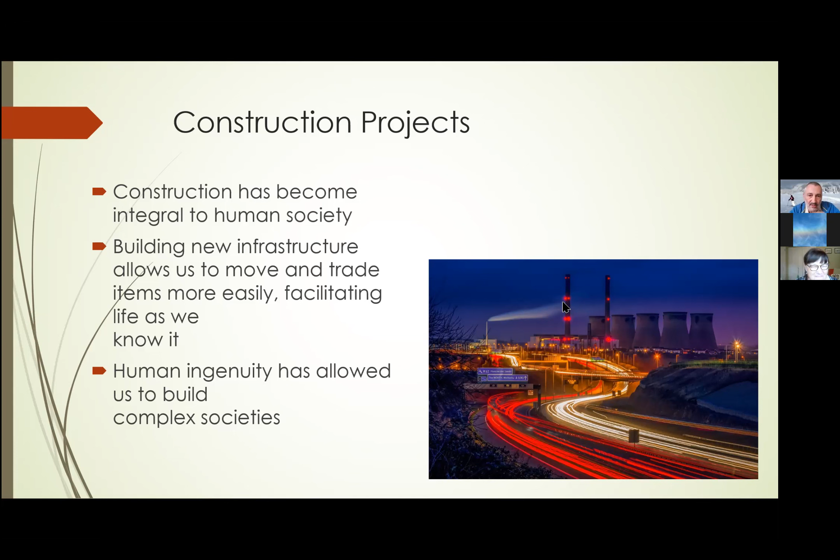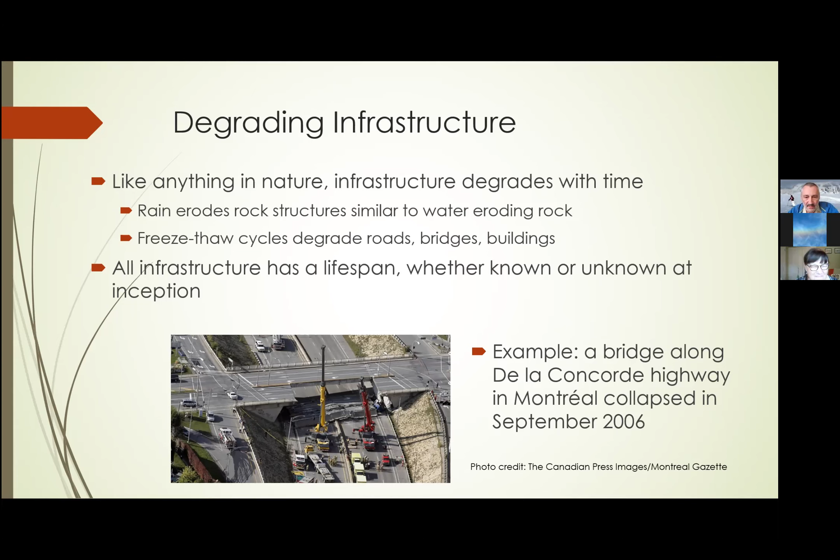See if I can move my thing out of the way.

Okay, so degrading infrastructure, depending on the land use, one of the consequences of infrastructure failure can be the release of toxic substances. Sometimes, of course, toxics are being released really essentially on purpose. And this often used to be the case. In fact, we can still detect sites around the world that were polluted under the Roman Empire some 2,000 or so years ago. Most of the places where they mined materials like lead and copper can easily be identified, especially when those were being smelted near their mines. We can still find the toxins that were released as a result.

We also know that the Romans contaminated a lot of the lakes in their empire, both with nutrients from agriculture and waste from things like towns and cities. And indeed, they would commonly dispose of waste into water, much in the same way that we do today. So there are all kinds of toxins out there that can be released into surface waters, groundwaters, soil, air, even into bedrock, which in fact is involved at Love Canal, which you'll see in a minute. And there are well over 60,000 man-made chemicals in addition to all of the minerals that are naturally occurring. So extremely complicated systems into which a wide variety of toxins can be introduced.

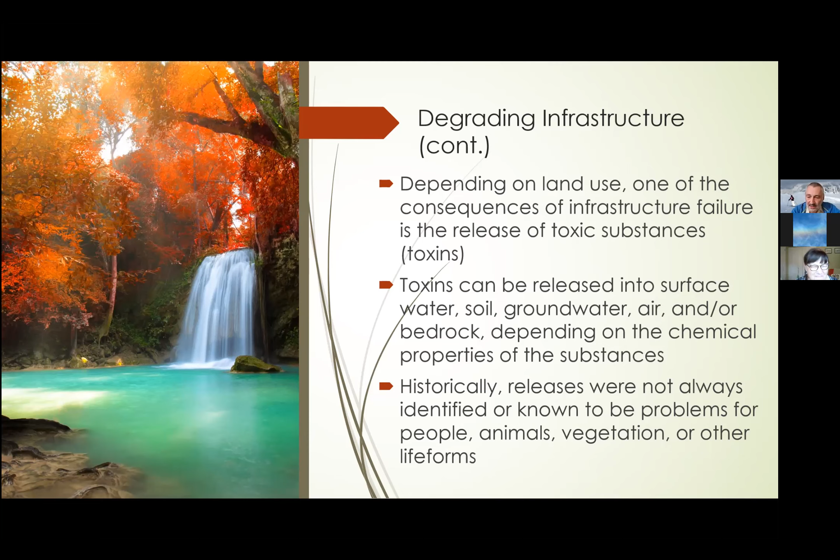So we haven't always known what the problems might be from releases, whether they were intentional or not. But certainly over the last, I would say, 50 or 60 years, we've been able to identify all sorts of effects on animals, vegetation, and other kinds of life, even down to bacteria. Move this box again. So contaminated sites are places where our human infrastructure has degraded and caused release of toxins into these surroundings. I should add to that, they also include places where we have simply allowed materials to get released, haven't sufficiently taken care to make sure they got contained or allowed the containers to degrade, which is what she's after here.

Toxins can be persistent, especially if they are heavy metals, which essentially never go away. Sometimes they can be changed into other forms that are more or less toxic than what is originally released.

They can certainly make life ill. Life forms can get very sick from being in contact with toxins, whether they are absorbed through the skin, inhaled, ingested, whatever it might be. But sometimes the effects are really not very noticeable.

For example, you can get effects on reproduction where you have an adult organism that appears healthy, but is incapable of producing viable offspring. And at the other end of the spectrum, it's possible to die from getting exposed to something on a contaminated site.

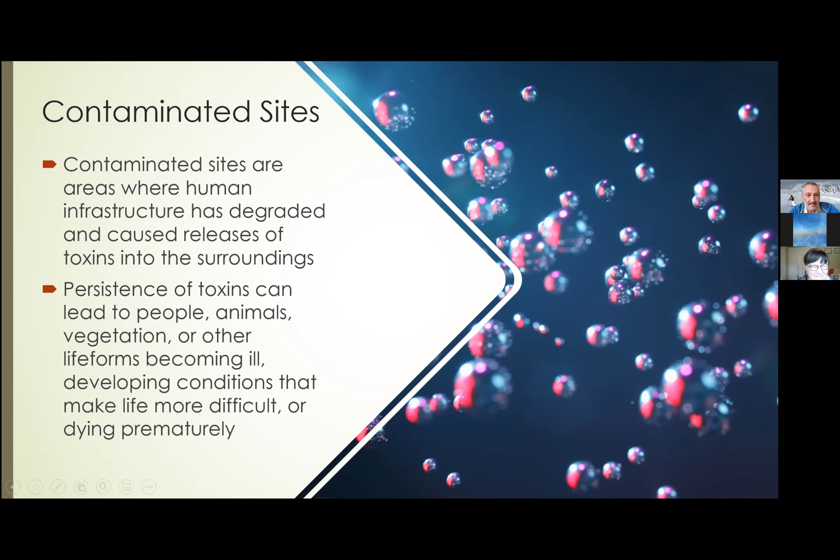So what can we do about contamination? We have a limited amount of livable land, as she termed it. Habitable land is another term, essentially equivalent. Any area where we have contaminated the land that might be important later for sustenance of other people and other life forms is what can be considered a contaminated site, and for all intents and purposes, no longer habitable.

Cleaning up contaminated sites has been done for a long time, but it's really become ingrained in our thinking, I would say, in approximately the last 5 decades, really starting in about 1970 with the United States going forward with the United States Environmental Protection Agency and the National Environmental Policy Act that came in at the same time.

In Canada, generally, we have a framework. It depends on which province you find yourself in, because this is really not highly organized at a federal level. Sometimes you're subject to federal rules for one reason or another, such as land ownership. Often you're subject to provincial rules, and whichever one is the most stringent is probably the one that's going to have primary effect.

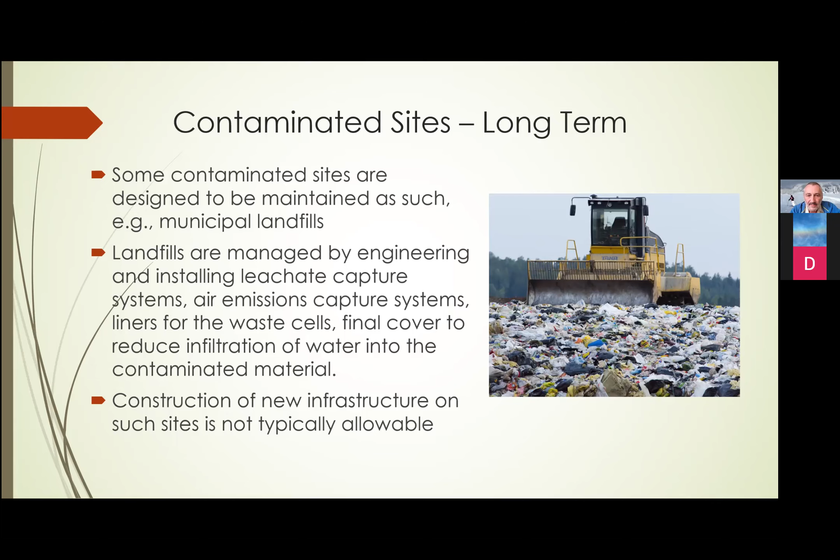Very famous contaminated site in Ottawa. And that was mainly because of a wide variety of small industry that was there. So if you have a contaminated site, you're often not allowed to build anything on it until you've done some kind of cleanup. So that would be called a brownfield.

So what happens if you build on a contaminated site? She chose to bring forward one of the most famous contaminated site incidents in the world, which was at Love Canal.

And the original idea by William Love was that he would build a canal to bypass the falls and allow shipping to get between the two lakes more easily. There was a wide variety of problematic economic conditions in the 1890s and 1900s. Eventually, the canal project and the adjacent residential development project both went bankrupt.

There were sales that resulted in the land being taken over by various organizations. One of them included a local power company. One of them included Hooker Chemical Company. I'm sure there were many more complex legal cases. So parts of the canal were used to dump municipal garbage in the 1920s and later by Hooker Chemical in the 40s and early 50s to dump chemical waste.

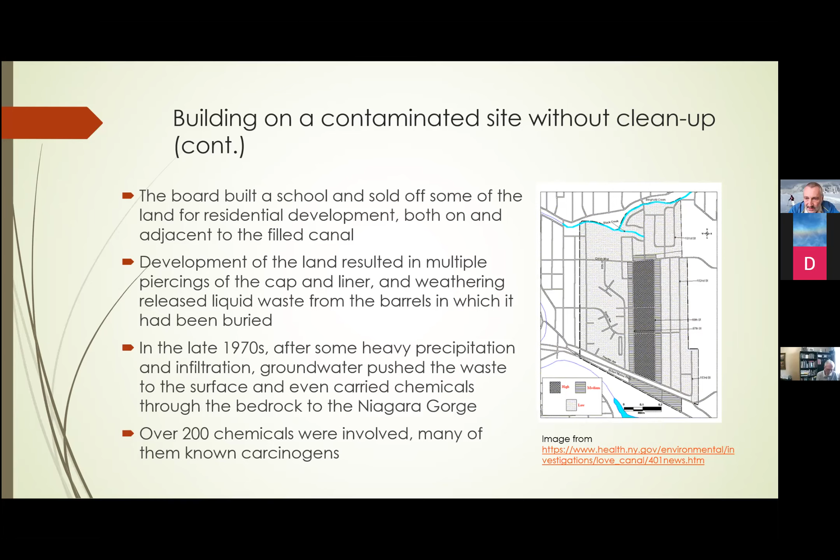As a result, gardens died, but people started getting sick. And it turned out that lots of the young families that were present in the area were experiencing defects among the children that they were having. Eventually, the United States federal government, the EPA, was forced to take over the site, and it became one of the first sites that was put on the national priorities list under Superfund and the comprehensive... I wrote that name down because I knew it was going to be difficult.

CERCLA. Maybe I left the notes upstairs. Where's CERCLA? Comprehensive Environmental Response legislation. Anyway, the L stood for liability. Of course, it doesn't affect Canada directly, and I haven't been involved in this kind of work for a long time. So CERCLA is kind of not in front brain at the moment.

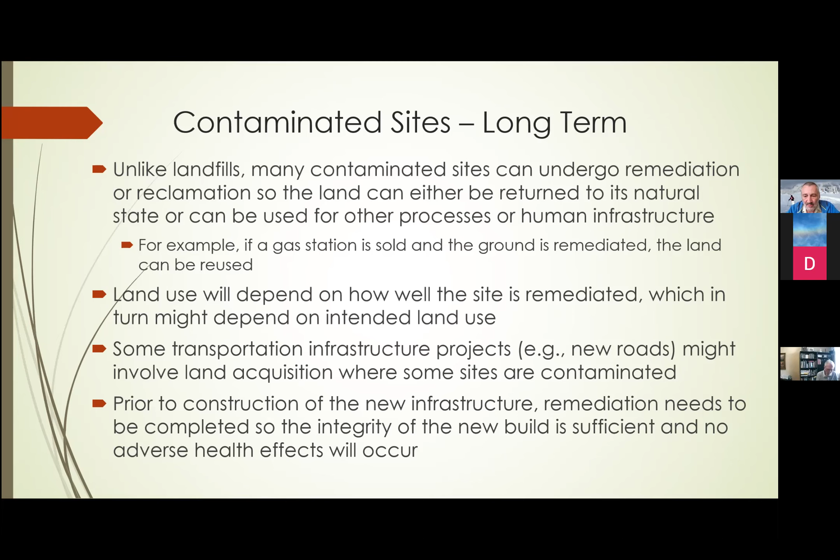As a result of that, you need to have a large number of disciplines involved in planning the reuse of a contaminated site. The cleanup, even the maintenance and ongoing management of a contaminated site requires that you use the expertise and knowledge in all sorts of disciplines. Some of these are trades as well. And some of them might come down to, I'm not sure that you would call it a trade, but for

example, truck drivers. I was describing to Art yesterday that I was involved in work on a site where we had to bring in a portable incinerator to burn up some contaminated materials on site, much more cost effective to do it that way, given the large volumes they had. And they only had about 2 inches of clearance, 5 centimeters of clearance, for this incinerator between a couple of the buildings that were on site. And it was only through having very good people driving trucks that they were able to bring in and set up the incinerator.

The cleanup itself is almost certain to involve many more people than you might think at the beginning, because lots of different people have interests in this. There's going to be all kinds of interest in making sure that the work is done properly, that workers aren't compromised, that neighbors aren't compromised, and that the people who will eventually occupy the site aren't compromised. And that's not to ignore wildlife and vegetation that might be in the area as well.

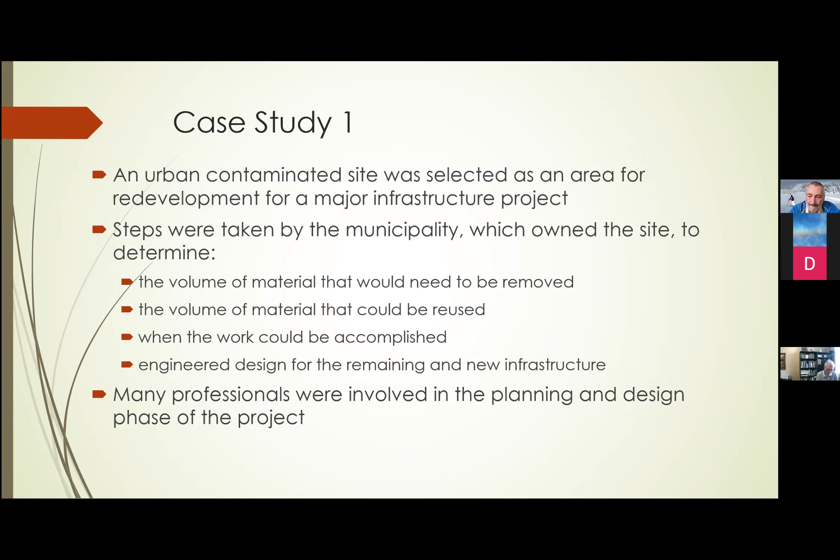Prior to construction, they had to do wildlife surveys to make sure that they were not going to compromise important local birds in particular. They assessed risks because they knew there was a possibility that some of the material on site could actually affect the health and safety of workers who were coming in to build new infrastructure. They needed to be aware of chemicals at the site because what had been buried was actually known at the time to have produced hydrogen sulfide and methane gas when it was broken down. So they had to manage all those types of things.

And in some places, exposure of the contaminated materials that had been buried resulted in spontaneous combustion. A number of times, the fire department had to be called to put out fires that were on the site, and they had to put in a ring of monitoring wells to look for subsurface spread of the fire to make sure that it didn't go nuts.

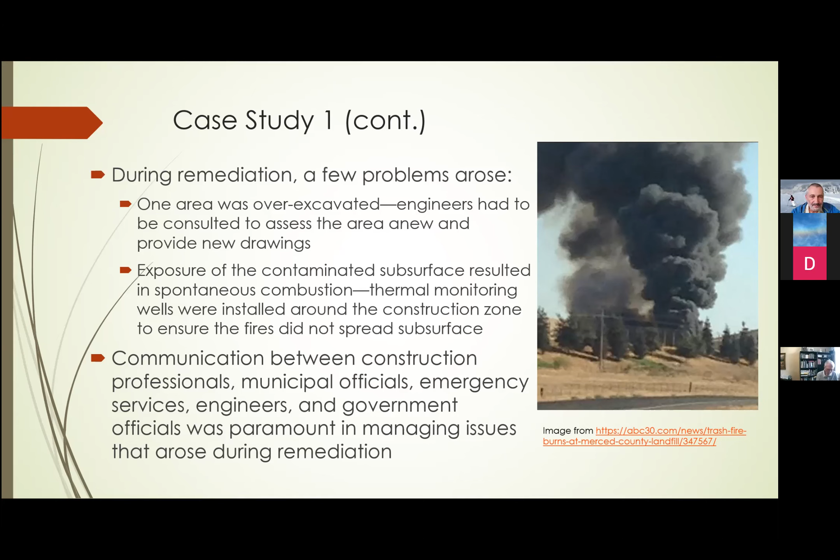Well, takes me back to something about Love Canal. The materials there actually got released into the subsurface and went right into the limestone bedrock underneath, traveled northwest, and were detectable in the walls of the Niagara Gorge. And the material that was running down the rock wall on the inside of the gorge was getting vaporized and becoming part of the air in the gorge. Next time you're thinking about going on the Maid of the Mist tour, you might want to think twice. Actually, I think they've cleaned it up, so you probably don't have that concern anymore.

Anyway, they built a treatment facility right on this site to make sure that they could clean the water, test the water, make sure it was not something that couldn't be put into the sewers. There are municipal sewer bylaws in most cities that prevent you from putting highly contaminated material into sewers. So they had to make sure that they were within various guidelines, and certainly they wanted to make sure that they wouldn't put anything in that was so contaminated that it would kill off the bacteria that live in the treatment system of the city, because that's extremely sensitive and also expensive to handle if you've had a breakdown.

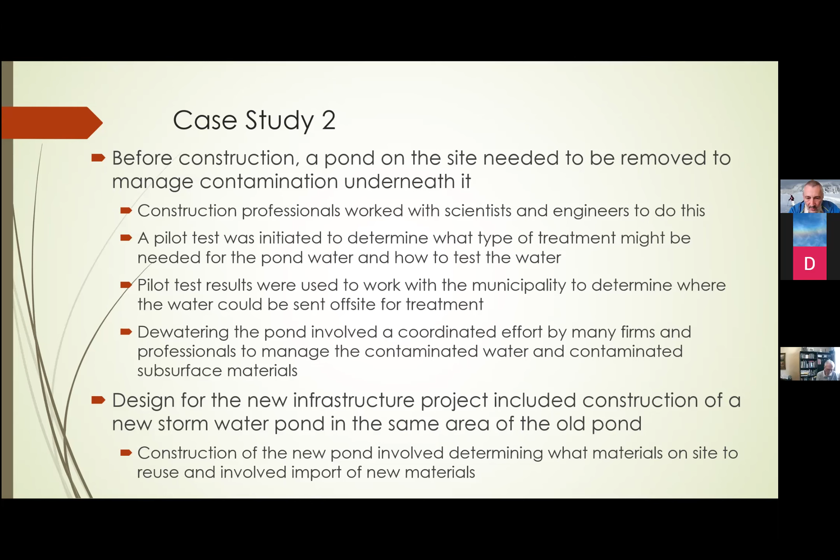If you're doing new construction, one of the things that you have to consider is, what are you putting in place if you're bringing in fill? You've probably seen signs before, clean fill wanted. Well, the last thing that you want is dirty fill. Nobody's going to call it that, let alone call it contaminated fill, but there's an awful lot of that around, and you need to be very careful about what you bring in and put on your land if you're looking at importing fill.

The next case study is going to show why that's really important. So you need to know from where your material is coming, and if your budget will afford it, you need to do some testing to make sure what you have. If you can't afford it, it may come back to haunt you.

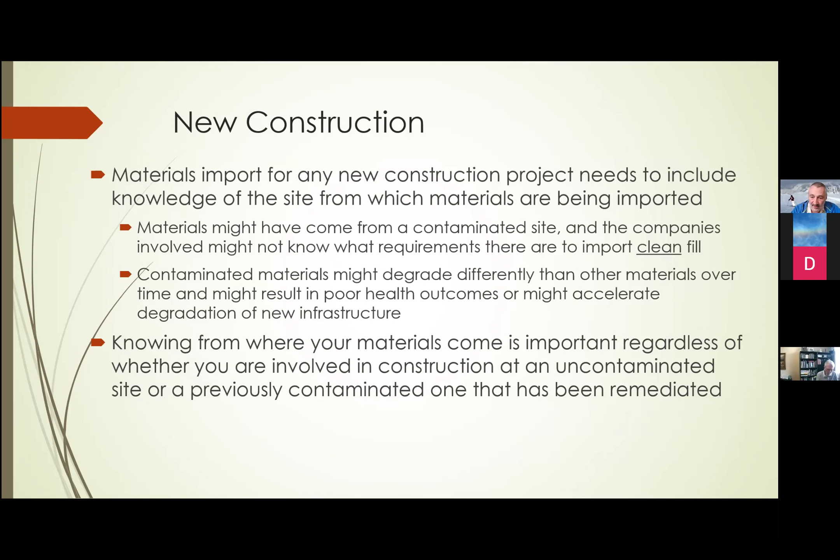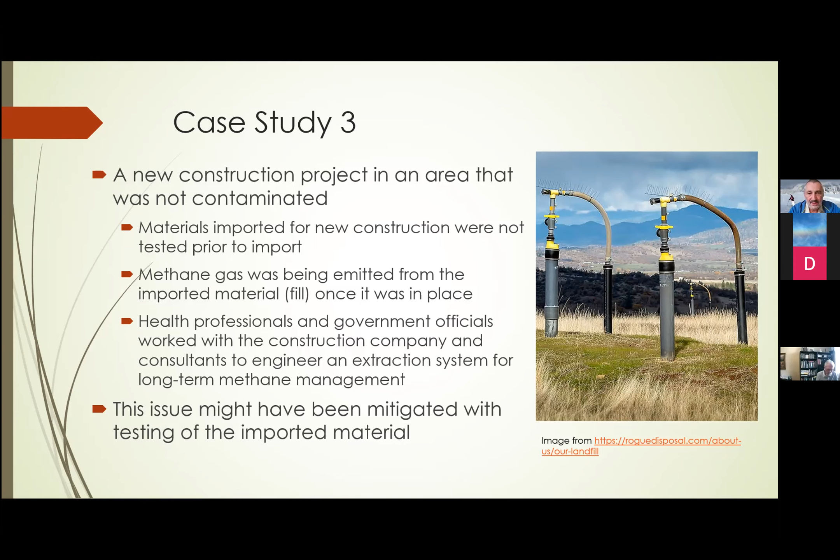So her conclusion is that construction projects are challenging at all times, but particularly so if a contaminated site is involved. And she had all kinds of examples of places where contamination needs to be suspected. For example, places where you've had mines, wells, fuel stations, repair shops, dry cleaners, warehouses, factories, landfills, pipelines, generators, fuel tanks, transformers, farms, greenhouses. I mentioned landfills, but the old word for landfills was dumps. Landfills these days are lined and capped when they're finished. Dumps usually had neither of those.

So a wide variety of different sites can be contaminated. In some of my experience, contamination can be particularly bad at many places you really wouldn't expect, but here's a good example: firing ranges, because the lead and copper that's in old firing ranges is actually pretty dangerous. The complexities of construction at contaminated sites make it vital that there be lots of professionals involved and that they have a wide variety of experience, have learned in the field, climbed the pole, hauled on the rope, so they know what to expect. But even then, you can get surprised.

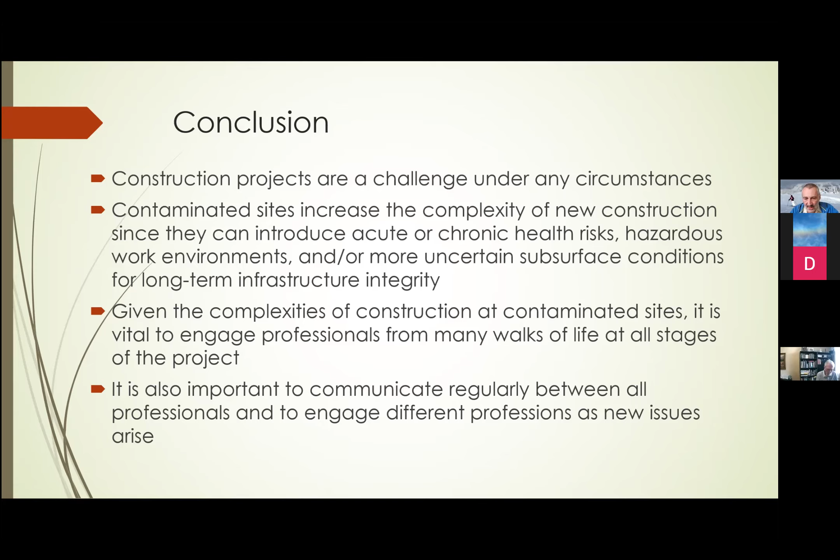And under the circumstances, it's extremely important that everybody involved in such a team be in communication at all times and know what's going on site. And so that's the end of the presentation. I would love to entertain questions if there are any.